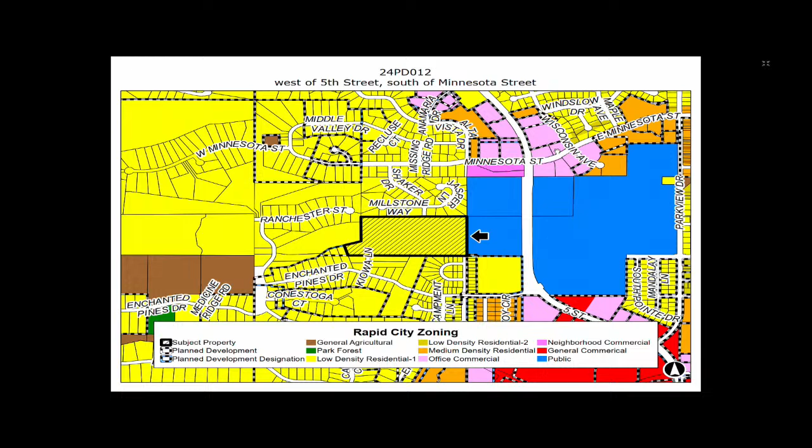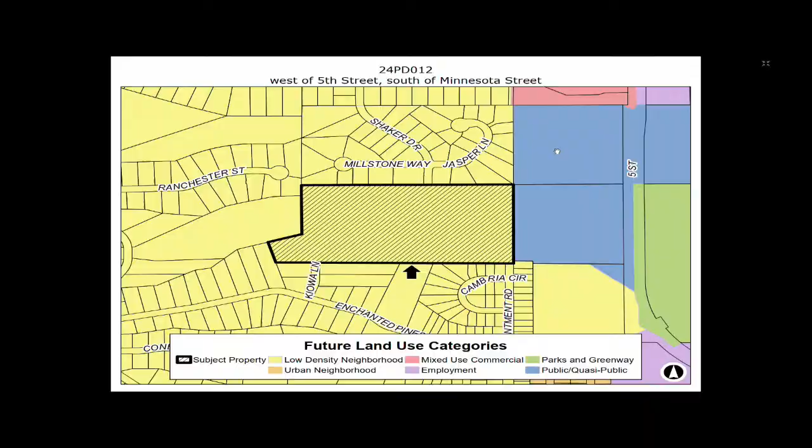The future land use here is low-density neighborhood, so we're trying to keep a lower density senior housing project. Here's the roadmap I mentioned. We've got Minnesota to the north, some through roads that come through here, and then Enchanted Pines. Both of those have access onto 5th Street—Minnesota with a signal, and Enchanted Pines with a stop sign.

The proposed development is about 80 units total, to be completely determined in the final plan development—approximately 40 units in the senior housing apartment building, and 20 duplexes, so 40 units of essentially single-family attached homes, on a cul-de-sac that runs through the middle of the development.

The senior housing is placed as close to 5th Street as possible, to avoid being around the single-family neighborhoods to the north and south. The property to the east is currently vacant, owned by the school district, and will likely become something else at some point—we're assuming potentially commercial uses as they attempt to surplus that land.

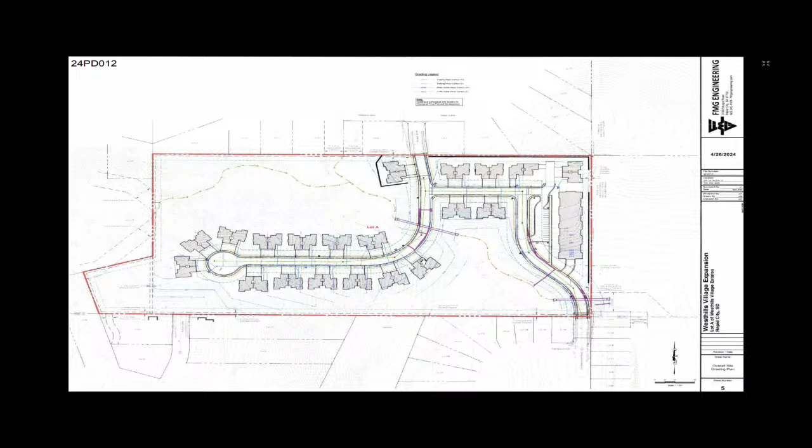This is the site plan shown. We did get some comments about the trees—I want to note they're removing as little as possible. This area sits very low as well, so viewsheds are not assumed to be impacted. Again, the apartment-style building is placed as far away from the single-family homes as possible. There's a culvert here; there was some question as to whether a bridge was being built. That's not the case—these are just regular roads with a culvert underneath to handle drainage.

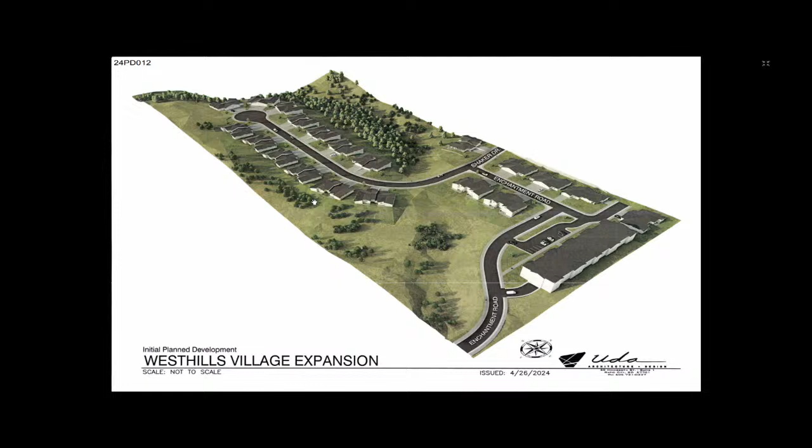Here's kind of how that landscape looks, whereas the duplexes are oriented more toward the single family neighborhoods and that kind of lower level area. And then the apartment style senior housing building is to the east there.

So I do want to mention staff is recommending approval with stipulations. We're going to see a lot more detail on the site plans, landscaping, those sorts of things with the final plan development. This one they did not submit the landscaping plan and the open space plan, so they'll actually be adding trees and open space amenities. The stipulations I want to note, we need the rezone to be approved and fully through and effective before they can finalize that final PD. That's one stipulation associated with that senior housing apartment building.

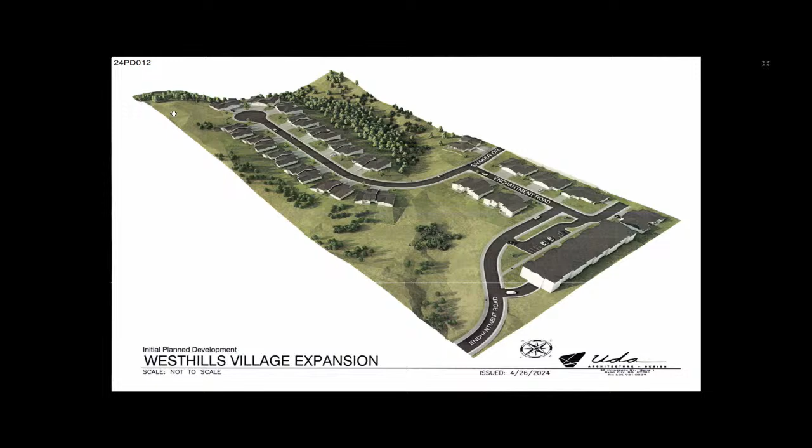And there's some requests from Public Works about, I'll go back to that one because there's a hammerhead that needs to come over here. So there's a road, and I'm going to butcher the pronunciation of it, Kiowa. There needs to be a hammerhead at the end of this on their property, so that is one of the other stipulations I wanted to note.

And then we are looking at a 3-way controlled stop here. And in discussions with the applicant, they also are planning to do fire suppression in the duplexes as well, because there are access issues for fire to be able to get to these areas. So they're willing to do fire suppression systems within the duplexes as well as the apartment building.

That is all I have. Sorry. Thank you. Any questions? There's a couple speaker requests on this item. Eric, do you have a question for staff ahead of that?

Thank you, Mr. Chair. It's a comprehensive submittal. It's quite effective, context sensitive. Love the big swath of trees that are preserved. It's great work. My question is, what is that cul-de-sac length? What is the length of the longer cul-de-sac shown?

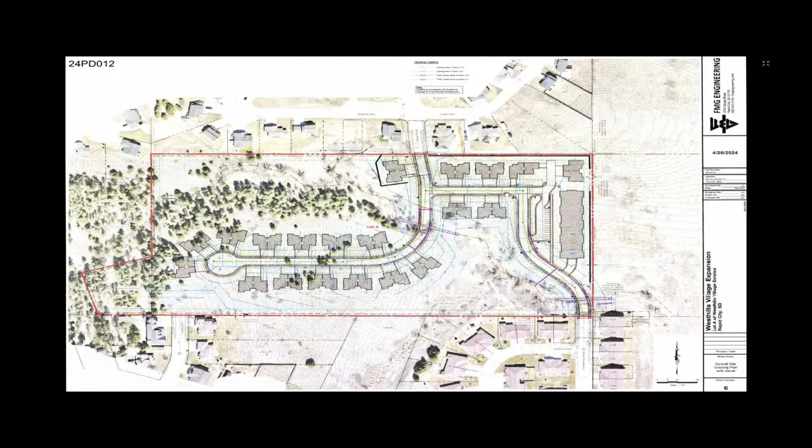Haven, I believe you had, can you request again? Haven? I had a similar question, I guess. You said something about there's a road here in Enchanted Pines, I think. I thought that one of the plans showed that road connected to the end of that cul-de-sac, and you made some reference to that I didn't quite understand.

So Enchantment Road will continue through, and it passes by this apartment building here. And then there's a couple of 3-way stops that go to, one will lead to the cul-de-sac. So all of it will connect through both Enchantment Road, and then it continues through Shaker Drive. And both of those roads have connections to Minnesota and Enchanted Pines for access out onto 5th Street.

And then what about the road on the lower left of this? Yes, so that one, they will be putting a hammerhead in that area, so it'll essentially be a cul-de-sac. It's just noting that it's on the property, so it's required as part of the development because that road was built to continue, but they're not using it, and so it needs to have a turnaround.

There will not be a connection between the cul-de-sac shown here and the road you're referencing. Correct, the topography does not lend to it.

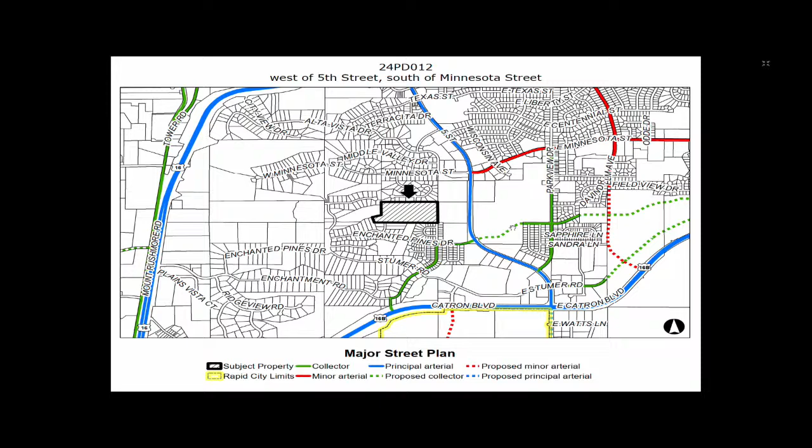Yeah, Vicky. If I can get you.

Thank you, Mr. Chair. First, I just want to stress that this is an initial plan development, so before they can secure a building permit, we will see final plans. For an initial application, this is an extensive amount of information that has been submitted.

I think that just goes to show West Hills Village is an established senior housing development in this neighborhood, and they continue to do several outreach opportunities for neighbors to come in and learn about the plans. Their presence in this neighborhood compared to just typical single-family residential has shown us manicured lawns, reduced traffic, landscaping brought forward in a professional design, and maintenance that is exceptional.

Looking at the acreage of this parcel as it stands, if another developer had purchased it, based on the size, we could get 140 single-family lots, thereabout, in this area. Providing senior housing, which the city is greatly short of at this time, we're reducing that number to 80. When we review this, knowing that this is a wonderful residential neighborhood, these are beautiful homes, well-kept.

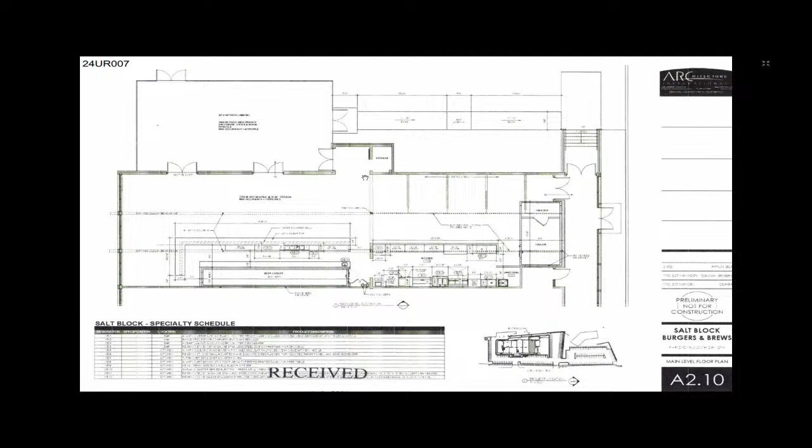This multi-tenant commercial building currently consists of 6 suites. The proposed use will occupy approximately 2,925 square feet of the existing building, which is Suite 6,000. They are proposing to serve local and regional tap beers and a variety of wine to go along with the restaurant, which will be Salt Block Burgers and Brews. They are proposing both indoor and outdoor seating, with some outdoor seating enclosed by a 4-foot fence. They plan to operate 7 days a week, from 11 to 10:30 p.m. Monday through Saturday, and then from 11 to 8 p.m.

On Sundays, we did do a review of the neighborhood within close proximity. This is located in a developing commercial corridor, and there does not appear to be any place used for religious worship, school, or a park or playground within a 500-foot radius.

The nearest property zoned residential district, which is something we look at, is to the west of the property, directly adjacent, but that property is dual zoned. It's within Pennington County jurisdiction, and is dual zoned right now, both suburban residential district and buffer of highway service district.

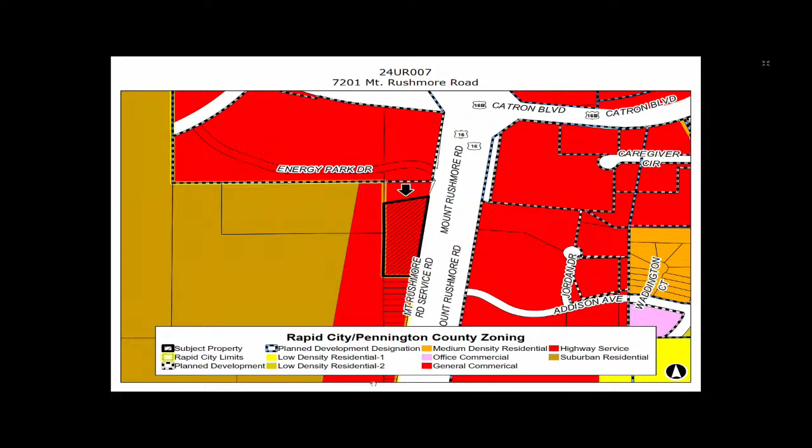I also want to point out that the nearest residential use close to this use is actually directly to the south. It is a single-family dwelling, but it is located within a highway service district zoning, again within Pennington County limits. So I just want to point that out.

They will be required to obtain a liquor license approved from City Council, of course, along with this request.

I do want to discuss a little bit about parking as related to this proposed use. Vehicle access is off of the Mount Rushmore Road Service Road. The existing building has 6 separate suites. 4 of those suites are currently leased for occupancy, and 2 of them are currently vacant at this point in time.

Based on the current occupancy, they are required to have a minimum of 91 parking spaces for what's existing out there right now. Currently they have 102 parking spaces provided, but occupation of those 2 vacant suites will change the parking calculation and demand, and will require additional parking on the property. Any change in the use of what is occupied right now could also impact their parking requirements.

So staff is stipulating that if this use is approved, they are required to have those 2 unoccupied suites remain as storage until such time that there is additional parking provided on this property.

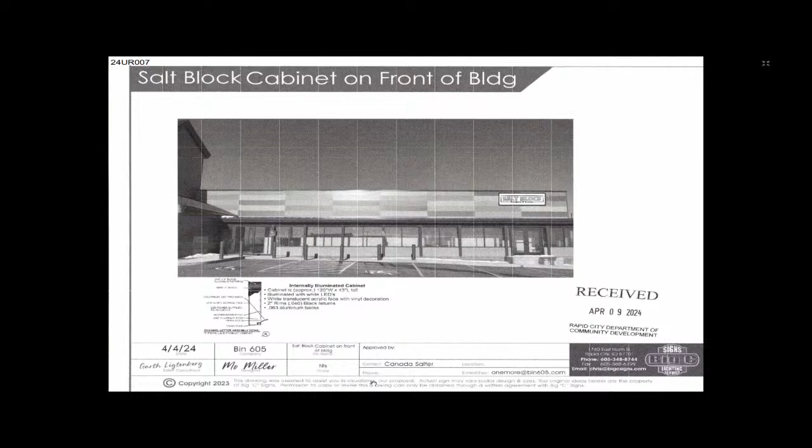So here is an outside rendering of the proposed new restaurant. Here's a side view of it. They are planning to add signage to the existing monument sign that's on the property.

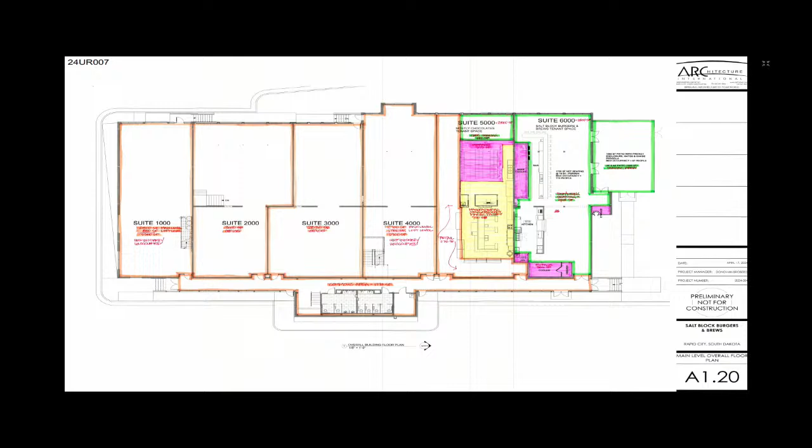It's my understanding that Mostly Chocolates, from where they were at down on Mount Rushmore Road, is relocating that operation up to this location, so yes, they would have some form of indoor access to their chocolates. That also makes me happy, so thank you. Good question. All right, any other comments or questions on item 6?

Maybe a motion? I'll make a motion to approve. Vince made the motion to approve item 6 with the stipulations, and Mike Quasney seconded that motion.

Any discussion on the motion? All those in favor, please say aye. Aye. Any opposed? Motion carries.

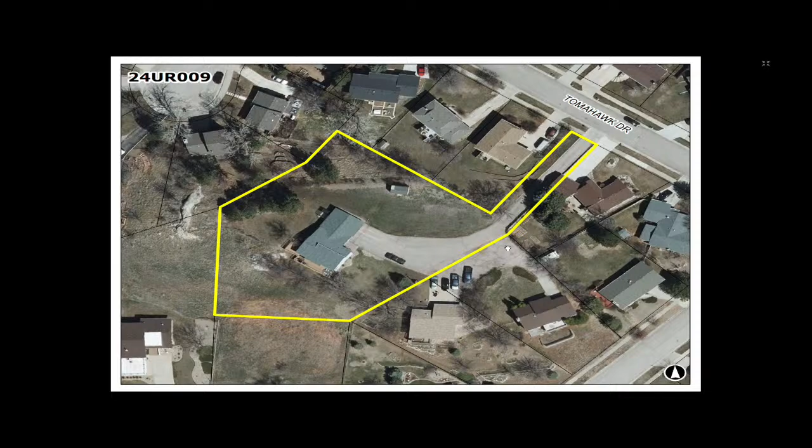Item number 7 before you is a conditional use permit request to allow an oversized garage at 2707 Tomahawk Drive. This property is comprised of 0.97 acres, currently contains a single-family dwelling with an 840 square foot attached garage and a small shed. The property is currently zoned low-density residential 1.

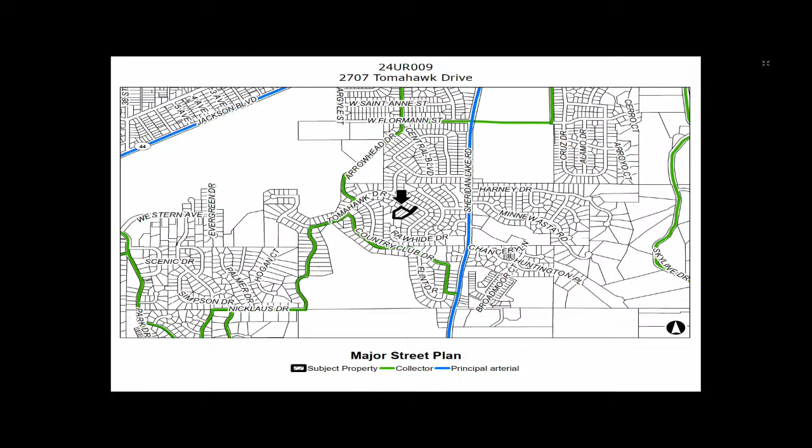Future land use is low-density neighborhood. We are off Tomahawk Drive, which is classified as a local street. Access to Tomahawk is off of Sheridan Lake Road through a winding path of internal local roads. What the applicant is proposing to construct here is a 24-foot by 40-foot detached garage.

What he is proposing to use this garage for at this time is a personal golf simulator for his own recreational use, not commercial in nature. He is proposing to construct this building as a garage so that if the golf simulator is removed in the future, this structure can still function as a standard residential garage. The existing shed on the property will be removed.

The reason this is being requested is by our code, the maximum cumulative allowable size of all private garages on a property cannot exceed 1,500 square feet or 30% of the size of the dwelling. So with his current existing attached garage being 840 square feet and his proposed garage being 960 square feet, that comes to a total of 1,800 cumulative square feet of storage space on the property. So he does exceed that maximum allowable square footage by approximately 300 square feet. So that's why we are here today.